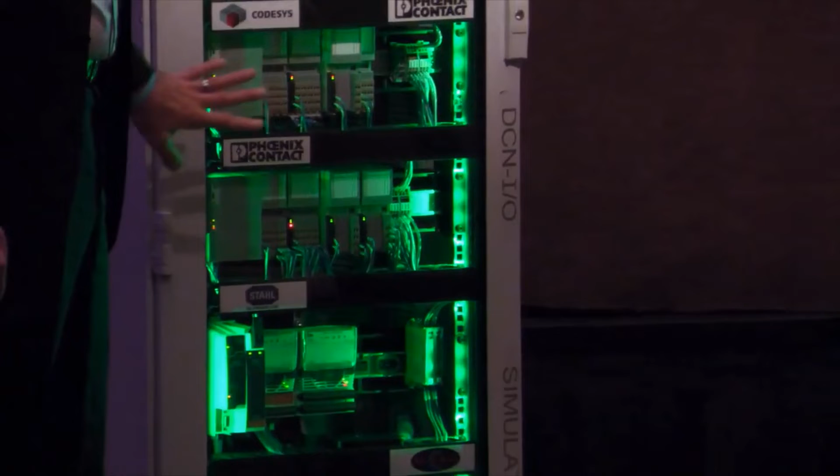The next three rails are the I/O functions. Hardware from two suppliers, Phoenix Contact and Stahl. This side of the rail are the I/O modules themselves in both the Phoenix Contact and the Stahl case. At my right, your left end of the rail are the PLCnext devices in the case of Phoenix Contact and a Stahl CPU node. And in these nodes is where we're running the OPC UA servers that produce the OPAS signals.

So OPAS signals are an OPC UA data type that is specified in the OPAS standard. So we've established a known interface to data with the OPAS standard. And so the data are transmitted to the OCF. So this part of the rack is the networking gear, the Cisco switch here, that is communicating the OPAS signals into the distributed control node compute devices.

So for the DCN computes, we actually have 9 of them in this rack. There's 5 from ASRock Industrial, 3 from Vecow, and there's 1 from Phoenix Contact here. So we're doing the regulatory control and other functions that I'll highlight in a minute in these DCN compute devices. And this is essentially all real-time Linux with real-time extensions running in these devices. Had to do Windows. The ACP is realized with Supermicro servers here at the top.

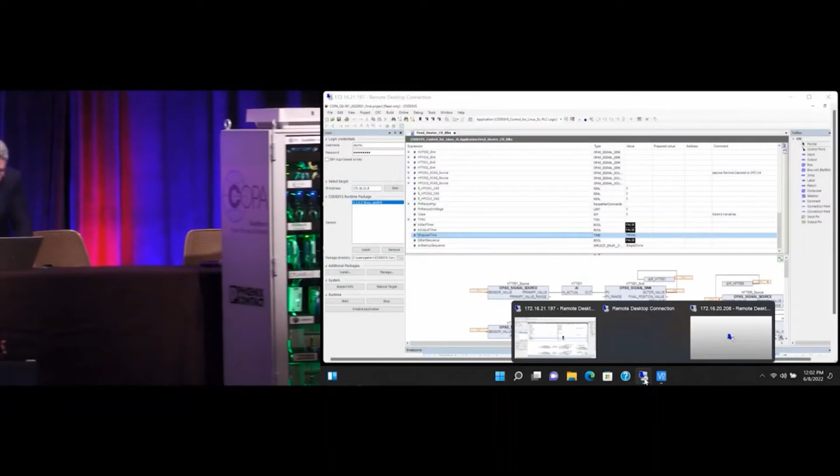Okay, let's see. Where are we, Brandon? Hopefully. Yeah, so what I'm going to display here in the room is what we've been displaying in the showcase room, starting from Monday night. It looks like it's running. Our CTO is working remotely in the background from San Francisco to get the system back up, booted and reconfigured. That's the Codesys system. I only have time to go to Ignition. Okay, super, guys. Okay, thanks.

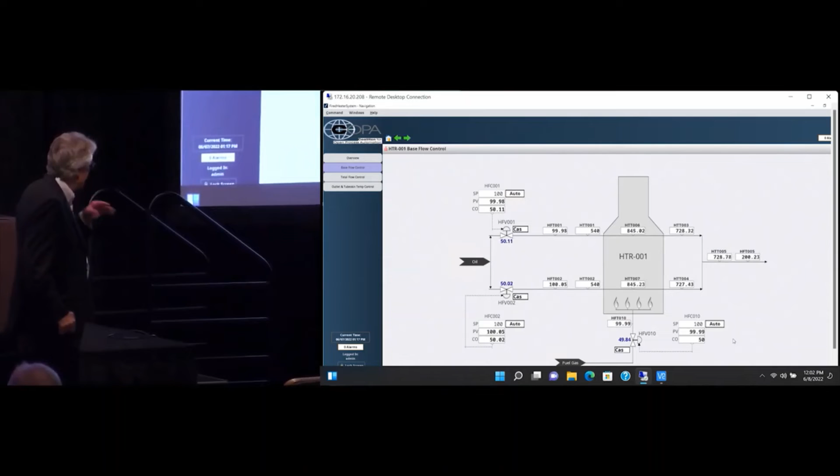Back in the game. Okay, so I'm going to be brief now because we've chewed up a lot of time with the technical problems. So this is the fired heater. This is the base flow control schematic. I'm going to get into application speak, but only for the purposes of illustration. You kind of have three control objectives on this unit. You want to control the coil outlet temperature. You'd like to control, but ideally maximize, the throughput of the process stream.

And then the third objective of a unit like this is you have to be careful not to violate tube skin temperature constraints. Okay, so as I said before, these are just the three basic flow controllers, one on each process pass, and then a flow controller for the fuel gas. So that's where you start. That's basic controls.

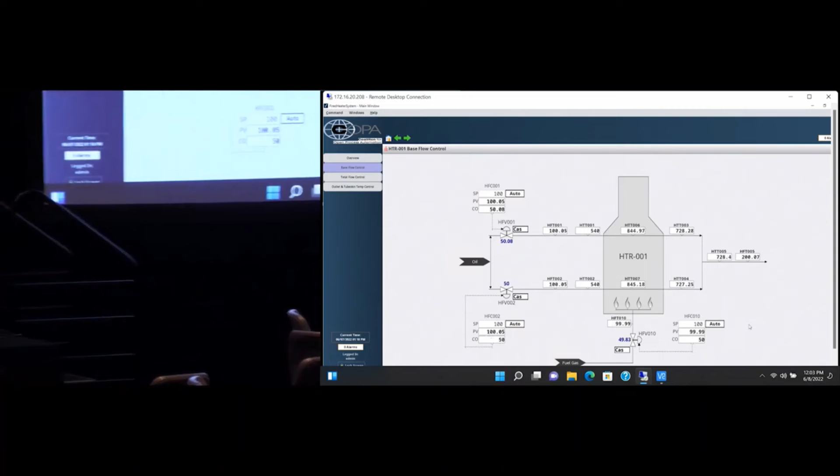Yeah, just to show you guys that this is real stuff. Brandon, let me come up there. So we're gonna change a set point. You're gonna see the numbers change. This isn't just white noise.

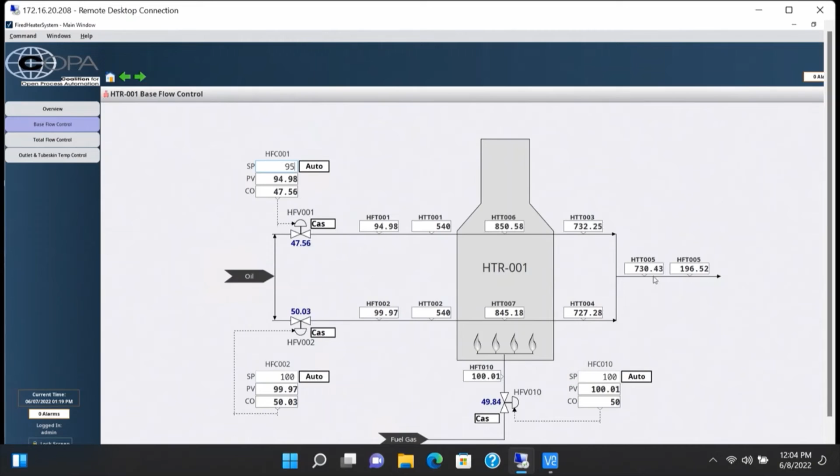So, okay, with that set point change to one of the pass flow controllers, you can see that the controller output changed, the throughput on pass 1 changed, and the coil outlet temperature is going up a little bit. Brandon, if you can click the outlet and tube skin temperature control tab. That's here? No, you see the frame on the left? Outlet and tube skin temperature.

Yeah. Okay, so we don't have time to illustrate this, but the point I wanted to make is that the second tier of controls capability that you would typically do on a real unit is to build a traditional multivariable constraint control application for the purpose of controlling the coil outlet temperature, satisfying constraints on the tube skin temperatures.

And if I had time, we would have set this up to show you a fuel gas flow change, because you want to raise the temperature. The tube skin temperatures would be violated. The constraint controllers through the selectors would kick in, and you'd see how slow this type of control strategy is to respond to that type of disturbance.

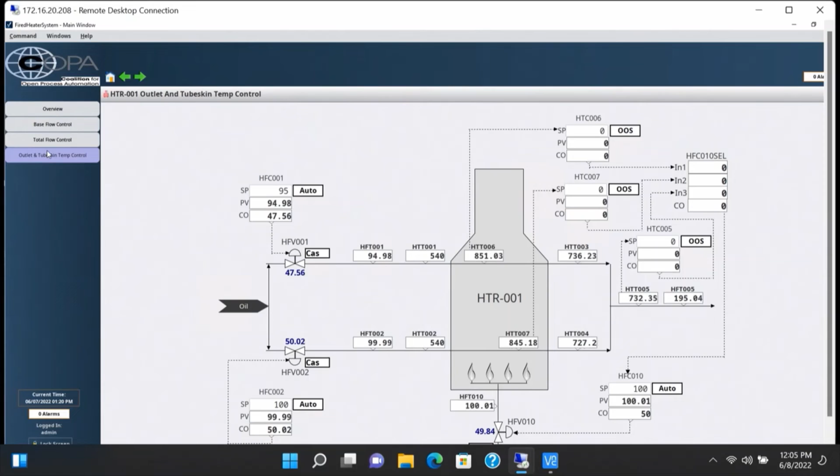And the third thing that any customer would get with the Quick Start system is going to be the CSI Model Predictive Control product. So for that demonstration, we're just going to roll maybe 2.5 minutes of tape. Okay, and that'll complete my part of the demonstration. Okay, so bear with it.

...is that model predictive control can resolve that in a much more effective way. And that's what we're going to do right now. We'll do the same experiment. So this is CSI model predictive control, Tom Badgwell is running. And I'm going to change the outlet temperature set point up to 790. Very carefully.

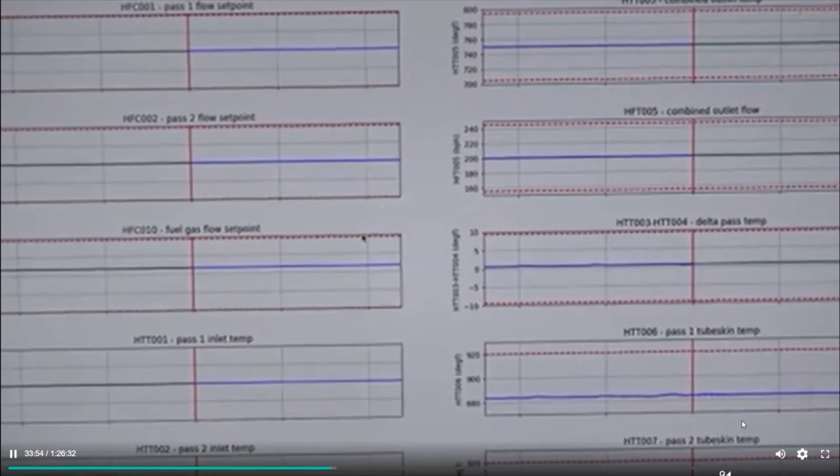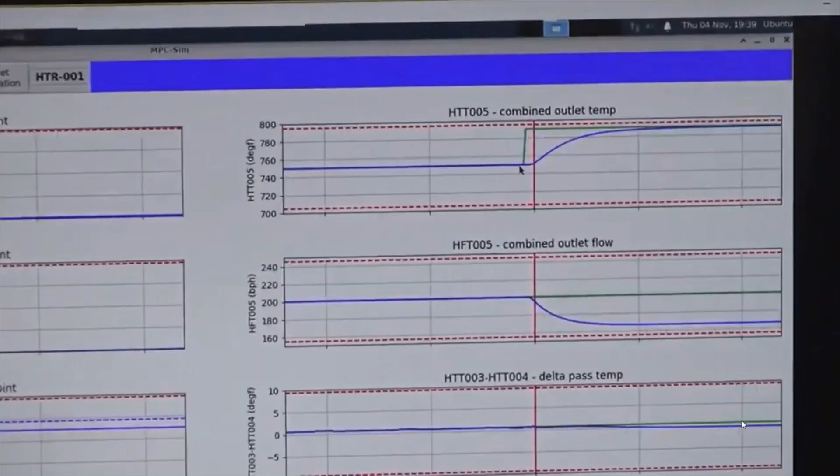And so what we're seeing here is the red line is current time. And so here's my set point change. And the controller is predicting this is what's going to happen in the future to the outlet temperature. It also says that the tube skin temperature is going to briefly go above this limit and come back down. But it's not going to go so high that it alarms. Before we saw the alarm go off, right?

So before the alarm happens, the controller brings the tube skin temperature back down, and now it's going to ride this limit for a little while in the future. And it also says that it's going to bring the outlet temperature up to its set point. And the way it's going to do that is to back feed out of the heater. So we're going to give up on our feed set point so that we can achieve our outlet temperature set point. And that's the priority that we programmed into the controller.

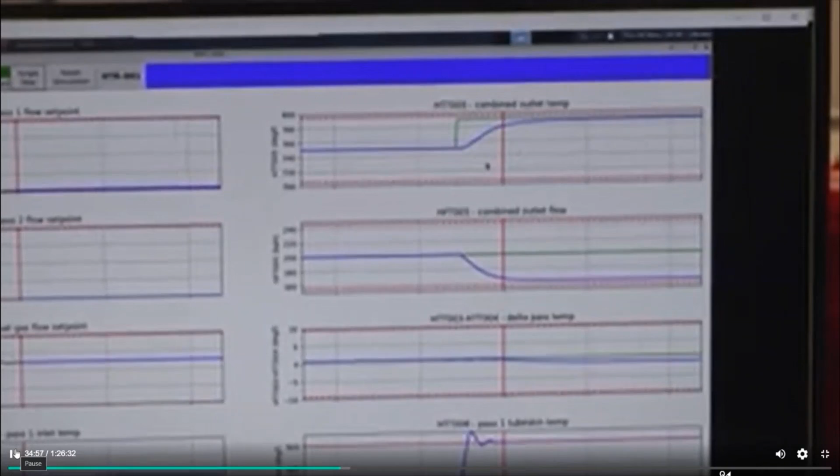And so this is the real value of model predictive control. You can set up priorities. You can respect constraints in a much more effective way. And with pretty much any MPC that I've implemented in a refinery, you can increase the throughput to the refinery by a tiny amount, say 0.5%, and you'll make multiple millions of dollars a year. So this is very effective control technology, and it's great to finally have a kind of system where we can experiment with new technology in this way and implement MPC at the edge.

Great, let's cut it there. Thank you. Let's cut it there.

Okay, so I want to close with one slide, then I'll turn it over to Brandon. Our customers are asking us to what extent there is alignment or conformance. We can't use the phrase conformance yet, but what's the status of Quick Start against the OPAS specification?

So who's got the slides? Can you advance a couple? Can you get to mine? That's good. But go back. That's one back there, Pat.